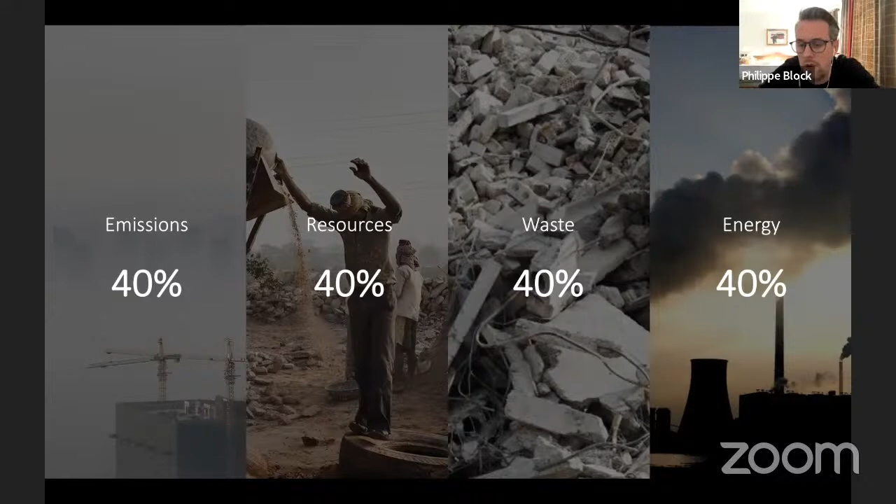I hope we don't do it like this, particularly because globally our industry—and when I say our industry, I'm talking about both construction in general and the building industry—we are globally responsible for 40% of the man-made greenhouse gas emissions, 40% of use of virgin materials or resources, and we are huge waste producers as well.

So I hope with these few slides, and again I do hope that I'm preaching to the choir, that you agree with me that we have to change both the way we design, but also how we build our structures.

As a structural engineer, a structural designer—so half architect, half engineer—I will be focusing mainly on the embodied emissions. Those are the ones related to everything that happens before you turn the key and start operating a building. So the impact of materials, of transport, of construction, and so on.

One of the reasons I'm excited to be in this field is because, maybe cheekily, we do have a theoretical solution to address the operational emissions just by switching. If we would do this at a global scale, we kind of have a solution: we can go for renewable green sources of energy.

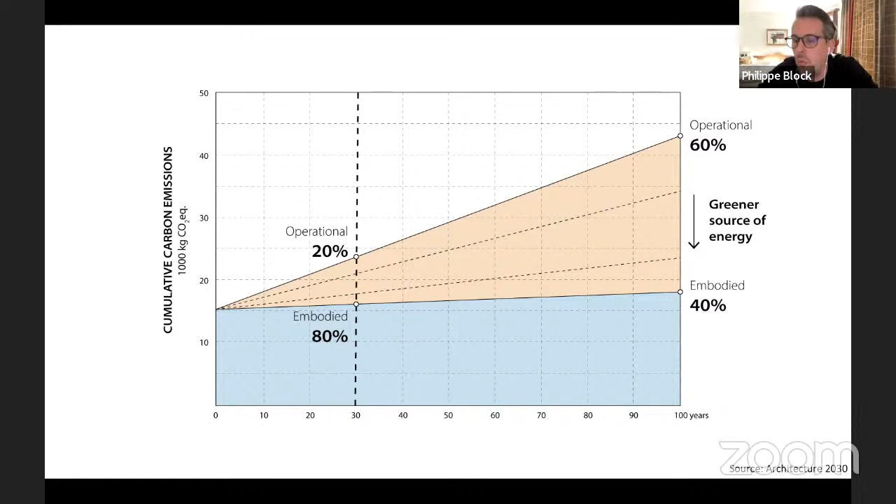These coefficients can be looked up for different contexts and different materials—numbers that give you an estimation of the emissions, the carbon footprint of a material. And then, last but not least, very important, you want to divide this over the lifespan of your building, ideally.

But this is also an opportunity to add some circularity, some circular thinking in there, because through those attitudes—and I will talk about this at more length through applications and examples—you want to try to keep resources, components, and indeed ideally your building, as long in the loop, in the circle, as possible.

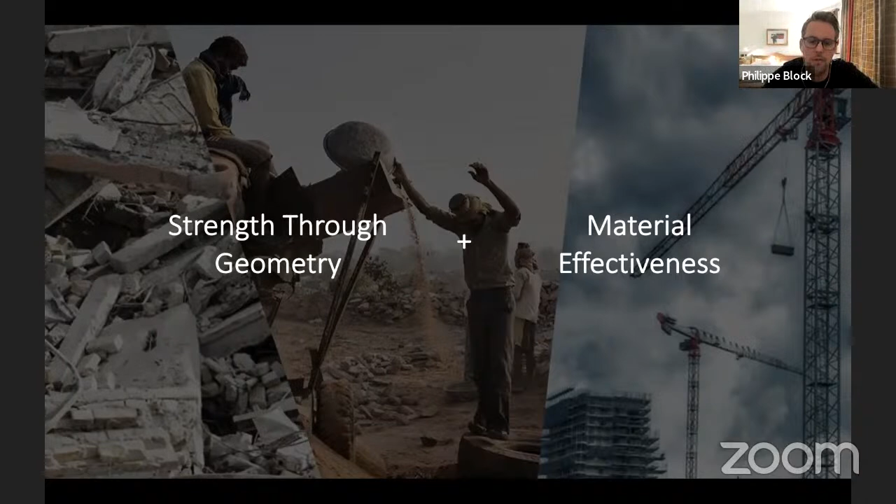So let's first look at strength through geometry, and I will use five projects that we have done to highlight some potentials and different aspects that could offer some outlooks.

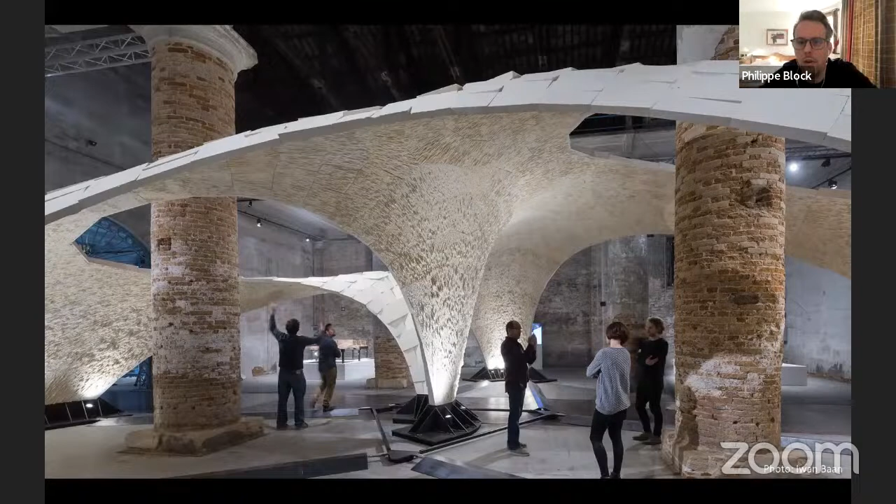I start with the Armadillo Vault that we built for the 2016 Venice Biennale. What you're looking at is a cut stone vault with 399 pieces of cut stone held together without any glue, without any mortar, without any reinforcement. This is really structural geometry, good structural form—gravity and historic principles that hold this together.

The reference for this kind of project was, of course, my original research focus on understanding why these beautiful structures—here the fan vaults at King's College at the University of Cambridge—are still standing after 500 years. The more I studied those, the more I realized that in modern design and engineering we might have forgotten some essential principles that allow these unreinforced vaults to be perfectly safe still after centuries, even though they have a thickness-to-span ratio proportionally as thin as an eggshell.

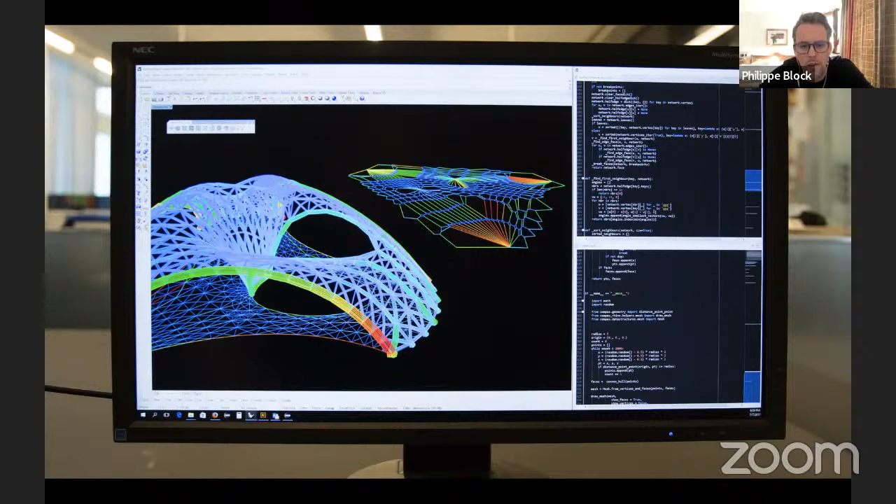So we have been developing a lot of tools to rediscover, to look at these geometries. This is, for example, Rhino Vault, which we showed very early on and which is used by many practitioners and students alike. But we did this statement at the Biennale because you can do anything on the computer, and we really wanted to shake the community.

And here you see, by the way, our colleagues of the Escobedo group out of Austin, Texas, assembling this stone vault indeed without any connection, just dry assembly.

So here you see some additional images. It is still in boxes. There are some rumors that it might finally be installed for its final resting place, I guess, but let's see if that goes forward.

But what I wanted to show with this project is, again, looking at this very thin sheet of a very humble, simple, traditional material, what you can achieve when you get the geometry right. The first thing I want to say is: if you get the geometry right, if you reintroduce these first principles of vaulted traditional geometry, you can significantly reduce the volume of your structure, so the mass—an important part in that equation.

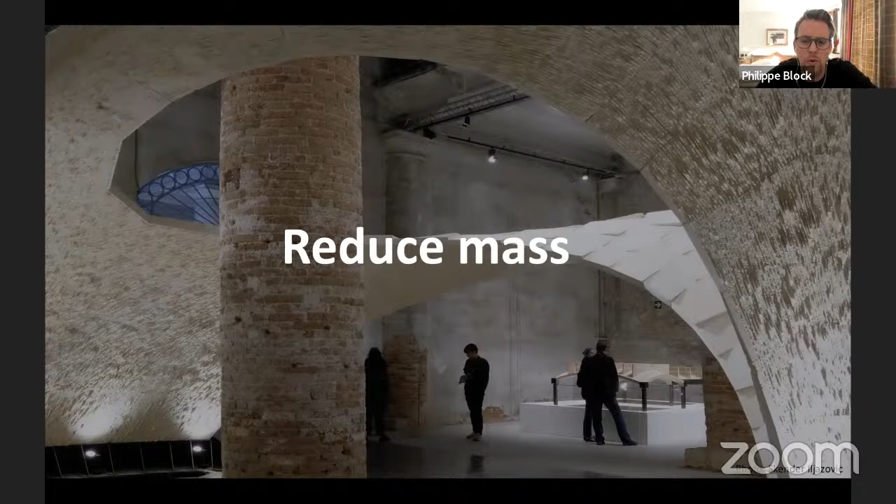A second aspect about strength through geometry I want to show through this project, the Mapungubwe Interpretive Center by Peter Rich Architects, John Ochsendorf, and Michael Ramage. I was lucky to be involved in the safety assessment of the engineering of the vaults that were built.

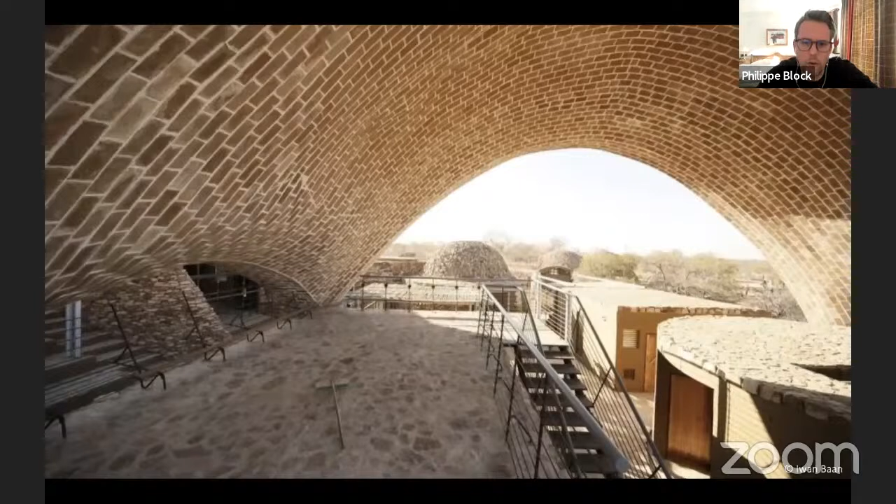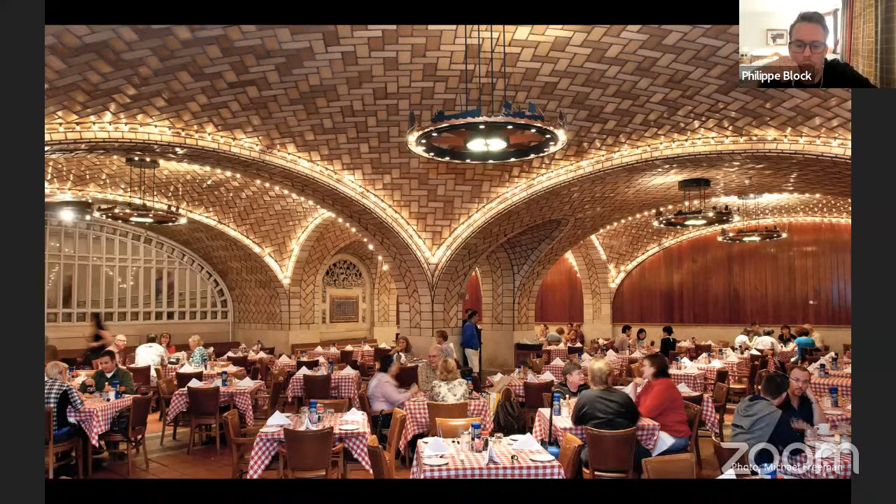This is in a very remote site, using soil-pressed tiles, so vaulted geometry tile vaulting. The reference here are these beautiful tile vaults by the Guastavinos, for example here in the Oyster Bar in Grand Central Terminal in New York City.

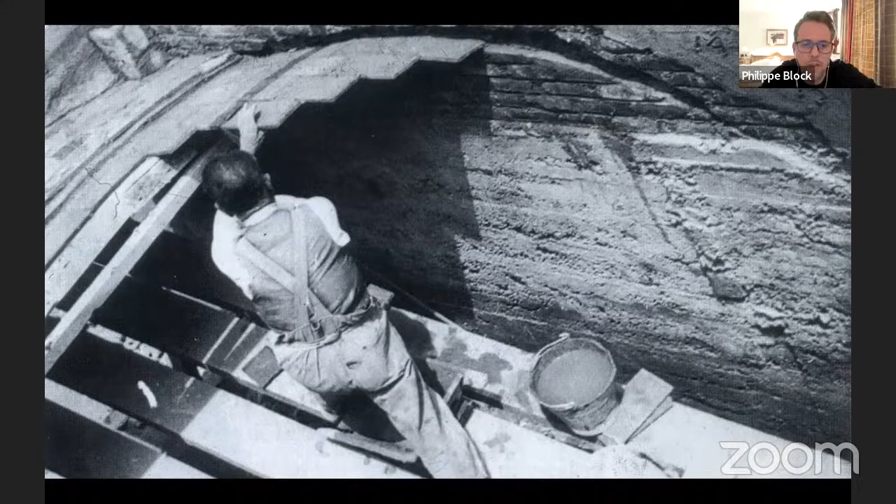So what you're looking at is not decoration. It's one of three layers of unreinforced masonry of tiles that were layered without the need of scaffolding—well, scaffolding yes to work, but no formwork needed.

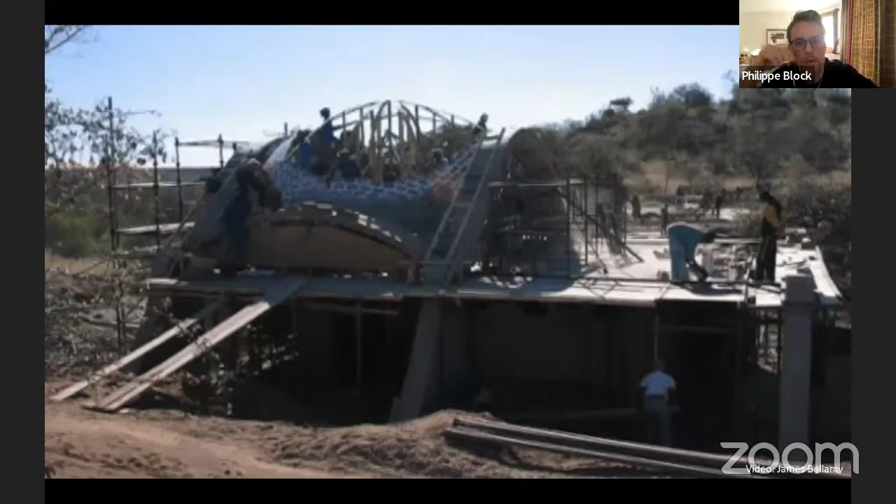This was great to introduce in a context where materials are expensive, where you had to bring in everything. So all the timber that you see there is not to support, it's not formwork, but is actually to guide unskilled laborers, over one to two weeks, to basically trace this funicular, compression-only geometry. Here you see some first successes.

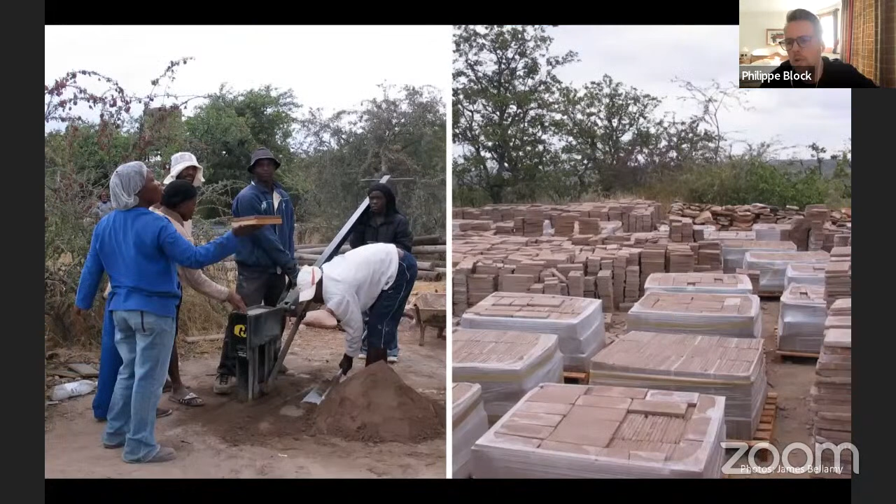But the reason I show you this project is because it was driven by using local resources in all aspects—local communities, but also local materials. So here you see on the left, the soil being compressed with just a little bit of cement, 7% of cement, to make these tiles that then could be assembled.

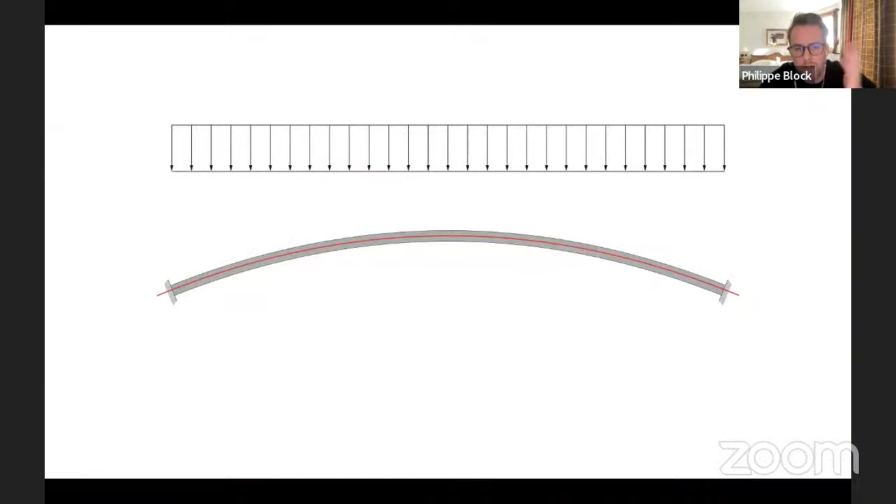So what's happening here is that we have an arch, but an arch is only good for a certain loading case that you design it for. You also need live loads. The red line represents where the forces might want to travel in compression. In this case, with the thin arch, we don't have a path to safely bring these forces to the support through compression only. So we added some stiffeners.

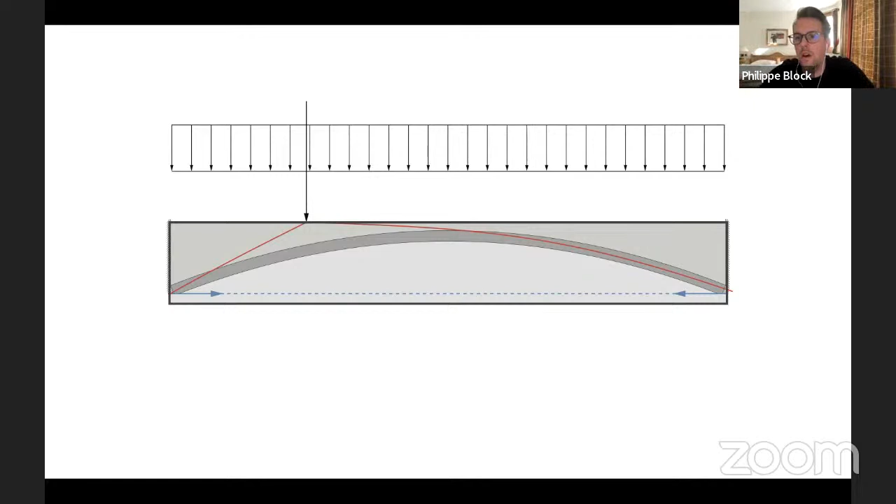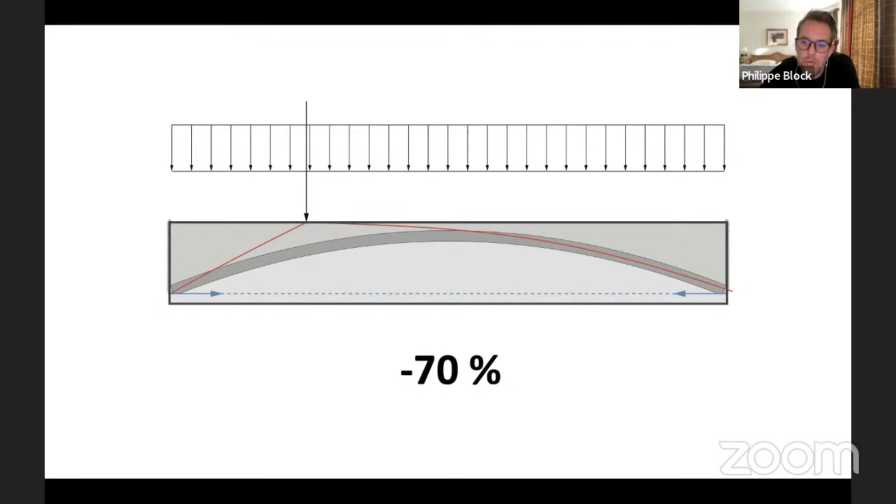And if you then add a tension tie, what I just did with you in the last 10, 15 seconds is we basically reintroduced an alternative to our typical reinforced concrete beam or floor plate, but one that uses 70% less volume, right? So this is actually exciting. There is no computation, there is no kind of complexity here. It's reintroducing common principles that we are no longer using. And in our context, I think this number speaks for itself why that is relevant.

So this was a nice case study early on in 2008. This was constructed, so this weak material is still the permanent structure for this museum building.

So the second aspect that I wanted to highlight is that if you get the geometry right, if you get strength through geometry, then on top of reducing the volume, the mass, you can also significantly reduce the emissions of the material. And why I can say that is because we can activate low strength material to be safely structural, and there is almost a one-to-one relationship between how strong a material is, its material strength, and how polluting it is, what its carbon footprint is.

So here, by just having these local sources, this of course offsets the impact again significantly. So that's the second part, the ECC, the embodied carbon coefficients in our equation.

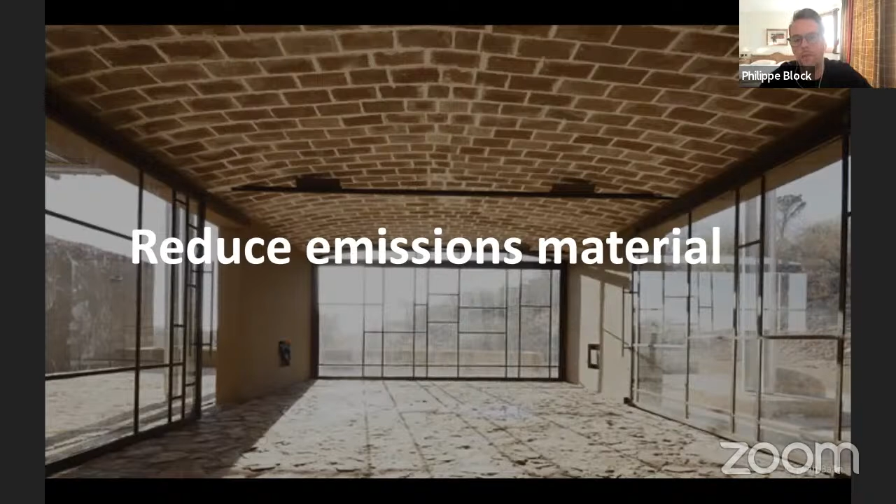A next project that I want to show is one of the latest that we have done. So Striatus, which was a collaboration with Zaha Hadid Architects and Incremental 3D. We just dismantled it. It was there for more than half a year at the Venice Biennale this year.

But we wanted to show that if you indeed treat the material for what it wants to be - I would say concrete is an artificial stone, and an artificial stone is happy in compression - if you can generate systems that really understand the limitations that we translate into opportunities of the material, then you can get to a next level of efficiency indeed.

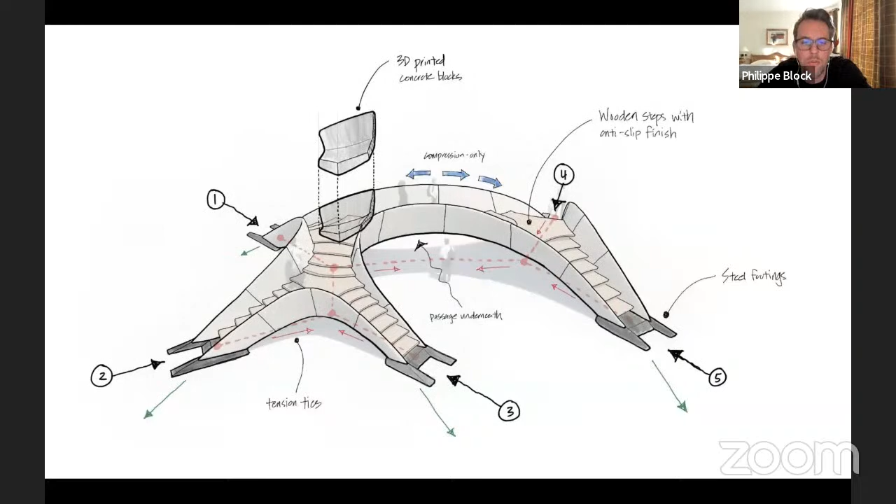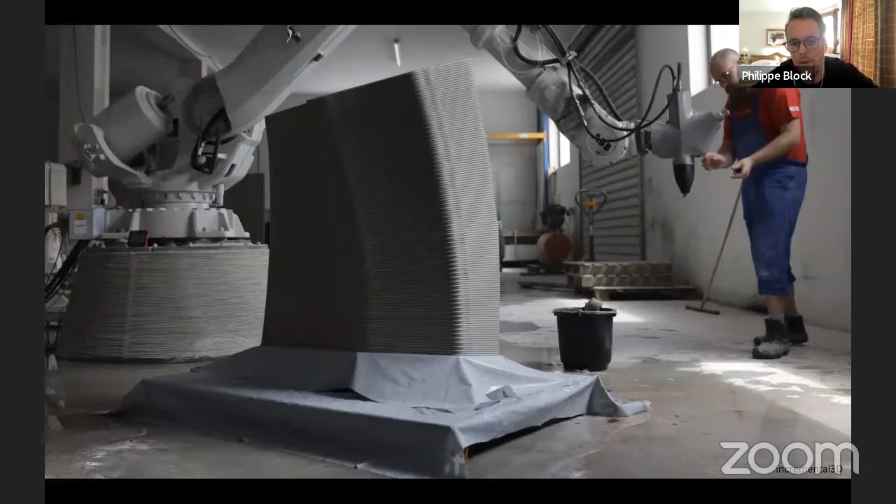So from the beginning, we used our typical masonry kind of strategies to discover geometries that would be suitable. But then on the level of the elements, it was important to use more advanced concrete 3D printing, called 2-component 3D printing, which allows you, as you can see here, to not have just a simple extrusion, horizontal extrusion, but an inclined layer printing, so that you can align your print layers to the forces in the system.

I don't have time to expand on this too much, but the trick behind all of this is that rather than what typically is being done - designing a geometry, discretizing it, then seeing if it works - this process actually started entirely the other way around. This is the work of Shajay Bhooshan, his PhD. In our case, we basically encode all the fabrication constraints, all the structural logics, both locally and globally, in the print paths. So we continuously treat the print path explicitly, and geometry is implicit. But of course, we also need strategies to have global control.

But this is a key thing in this project, very clearly: we set up a custom design framework that allows us to embed all this knowledge in every single design iteration that we generated as a collaborative team among all the different partners.

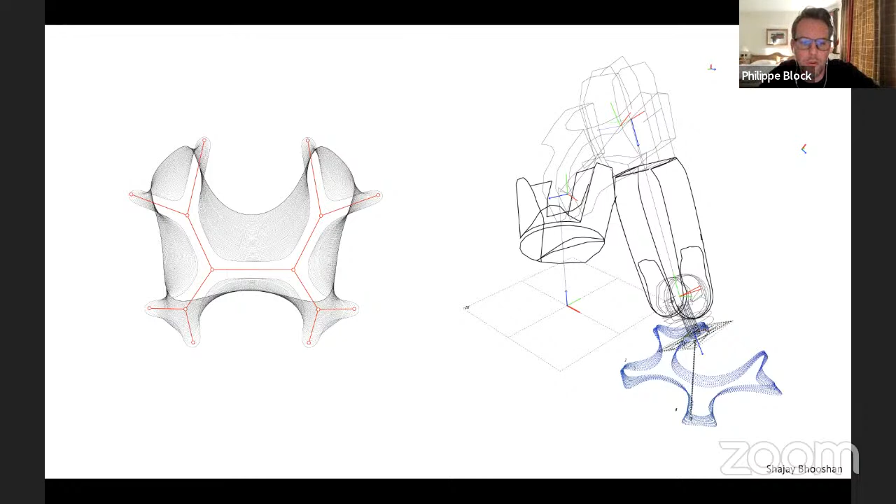But the key point I wanted to show is that I do see an outlook of an appropriate use of concrete 3D printing. Appropriate in the sense that we use this new technology to really offer the concrete material to work as it wants to be used, as a masonry system. So you see this offers, on the left, a synthetic stone that is hollowed out, where material is only placed where relevant.

And on the right, again, this alignment to a 3D flow of forces, which allows us to not only be unreinforced and dry assembled globally, but also locally we don't have any reinforcement in the 3D printed concrete. So there are no fibers, no embedded layers, and so on.

So this structure was safely designed using a combination of high-tech opportunities, the promises of 3D printing, and historic principles behind it. Another thing one has to highlight in the argumentation for 3D printing is that the 53 stones of the bridge had a total printing time of 84 hours.

This is super exciting, because it meant we could keep pushing the design engineering all the way until the final moment where we could just crank out all of these elements. None of them failed, because, as I said, the long-time experimentation and coordination between all the computational pipelines allowed us to fully understand what the constraints of this 3D printed material had to be.

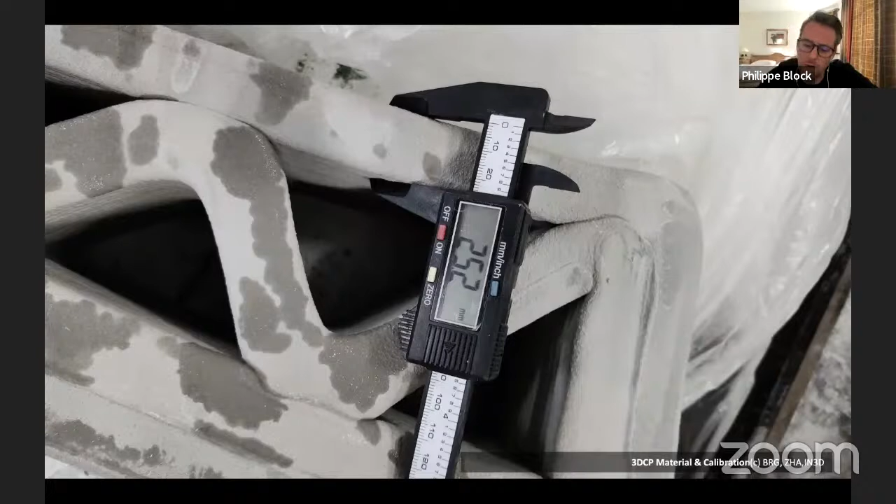In this case, the 2.5 centimeters thickness of the printed layer was not sufficient to deal with these local impact loads. That meant we had to basically have the nozzle pass twice over the structure. And so, even though this is not part of the global geometry, from a fabrication standpoint, you see that this changing of the nozzle creates a very dominant feature in the middle.

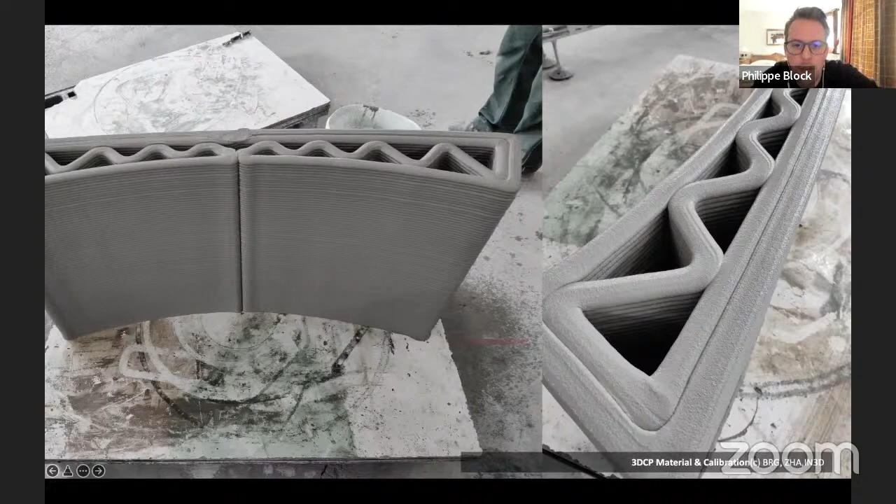The design team was not happy with this very pronounced feature. We only needed a thickening on the top layer, so instead we decided to have this turning around happen at every single layer. So this was something that was a necessity, a conclusion of fabrication.

But rather than being frustrated by it, we took it as a design opportunity to have aligned features that really show they're in line with the global force flow of the structure. And then, because of the masonry logic, we could simply assemble it on site.

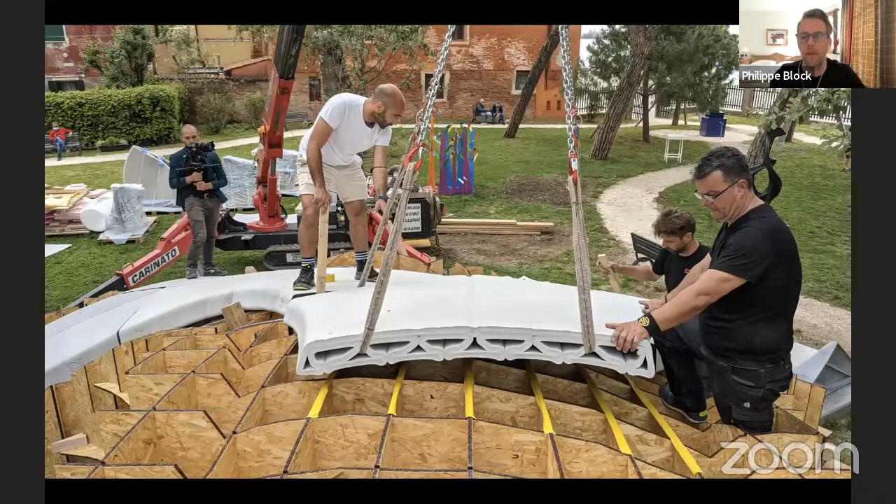I'll just actively say it before someone says, yeah, you talk about sustainability, but what is all this single-use timber you're using there? This project took just a few months, a lot of stress. We were innovating on the material side, the engineering side, the generation side, and so on. I'm already making excuses, but believe me, there was no more time to develop a fully reusable, demountable system.

I hope you'll accept my apologies that we ran out of time, but for me this is actually a no-brainer because you just need 3 points per piece. So we can imagine that in the next iteration, which I'm very pleased to say will happen, in fact a permanent structure, we will no longer use the single-use timber formwork.

So here you see another advantage: because we place material only where needed, these elements are very lightweight. That allowed, on the left, 2 people from a professional crew, together with 2 people on my team. You see, by the way, on the right, that is Tom Van Mele.

The brain behind many of the things that we do. With him, I co-lead the group. So only these 4 people, 2 non-experts and 2 experts, could assemble this bridge in just a couple of days.

So here you see that we only needed a very simple, lightweight spider crane to assemble these elements, and they nicely came together in a dry-assembled kind of way. So why was I excited about showing this bridge to the audience at the Biennale? Because we achieved different aspects that could really be a framework or opportunity more globally than just this funky structure we built.

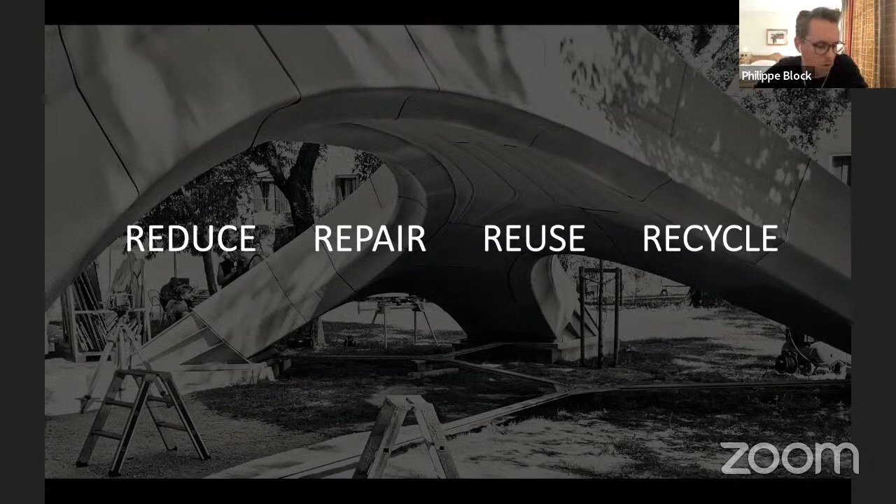All right, so that's what we wanted to show with this bridge. I'm happy that we managed to share these bigger points. It was in this beautiful garden - sadly, it's no longer there, so you can no longer go visit it.

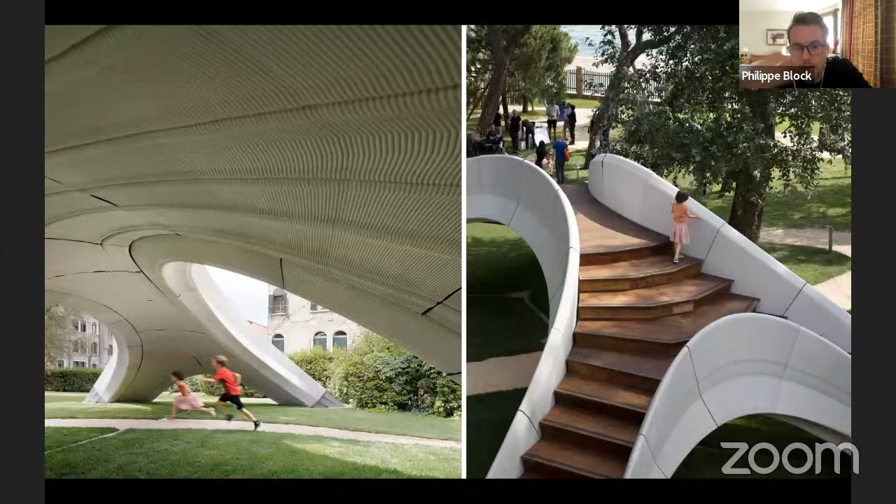But that's why I bring you a few nice pictures by Studio Naaro. Here on the left, you see these grooves, these features that were a fabrication necessity that we turned into a design opportunity. And yeah, it was great - every day at 5 o'clock the entire neighborhood came around, with the 20-odd dogs that loved walking under it, peeing against it, jumping on it, and so on. So this was a very beloved kind of object.

Maybe here also a nice thing to show is that because we have this global control - because we really control the print path from layer to layer - we can also control these kinds of little defects. These traces you see on these edges are actually where the internal stiffener nudges the outside layer a little bit. So rather than taking this as something we need to fight, we take it as an aesthetic opportunity to give that additional layer of legibility to the structure.

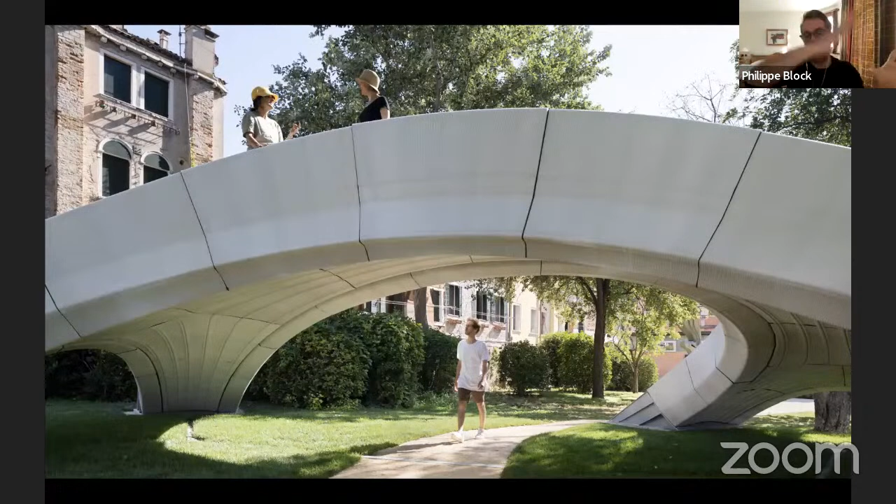So here you see very clearly what I started with - this masonry on two levels, globally the discretization, as we've seen with typical masonry, voussoir arches, like a Roman arch. But then you also appreciate this alignment of layers to the global force flow.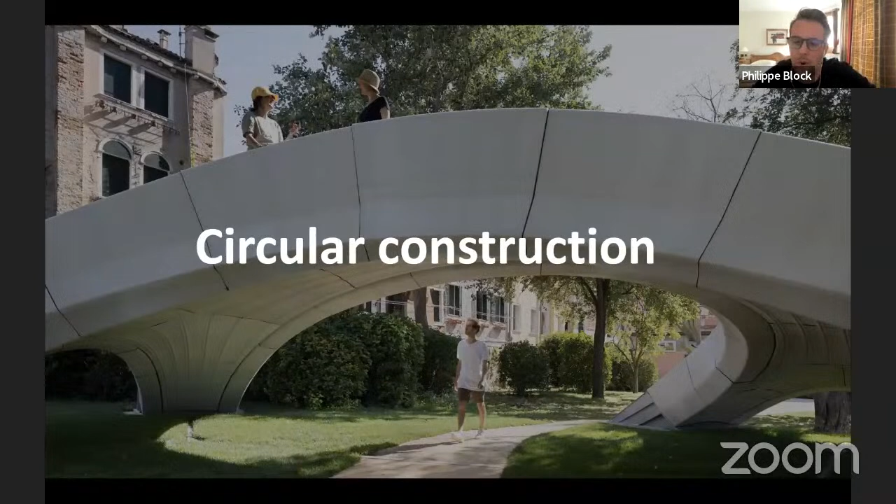So the message in this project is some hints about how you can start to address this. How you can start to design for future demountability, design for future recyclability. This is essential because with this unreinforced concrete, we have a pure, non-polluted material that can be easily recycled. That means that in the next batch of concrete, we no longer need to use virgin resources - we can use construction demolition waste going forward, as an example. But I also gave - of course, the better option is to directly reuse your components, and this will be relevant in the future.

As I said, it was very intense collaboration between our groups. Zaha Hadid Architects' CODE group, then Incremental 3D were the digital craftspeople, the 3D printers out of Innsbruck, and then Holcim developed the specific concrete inks, and also made this project possible by backing it financially.

But all of these different teams, all of these different innovations could not happen in parallel if we had not, from the beginning, found a way to make sure that all of our knowledge and experiences would come together. That is where we have used, in all aspects of this project, this open source computational framework which we have developed. It's been in development for 5-6 years, and it's now a full community-driven process. This is called COMPAS.

All right, next project. It will be a small sidetrack, but I still find it an exciting project to show. It shows the challenge and the potential opportunity of computational design and digital fabrication to address the fact that structural geometry is non-standard. Non-standard geometry is typically much more expensive, difficult, and wasteful to realize compared to our status quo, our polluting, problematic status quo of straight beams, floor plates, and so on.

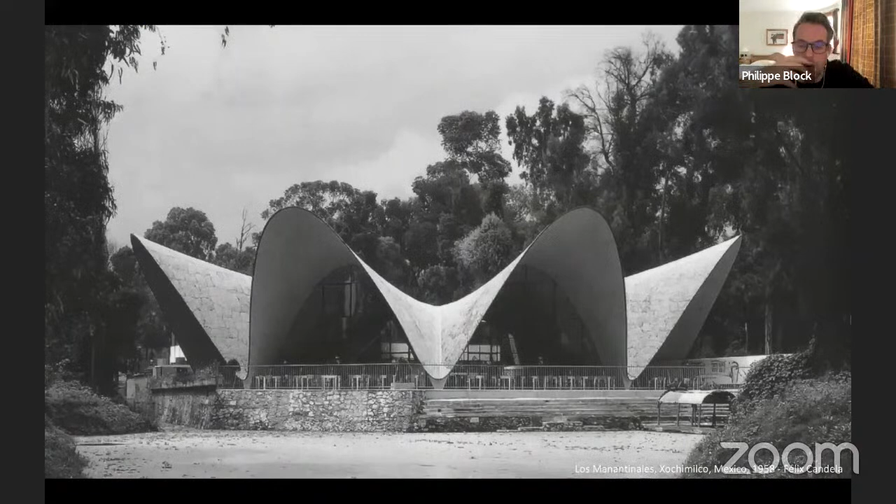So what we did with KnitCandela - it's already in the word - is we wanted to show the opportunities of a knitted formwork, a 3D knitted formwork, and we wanted to do this in the context of the famous shell builder Felix Candela. Felix Candela did these amazing shells, very efficient, hypar shells, with 30-meter spans and only 4 centimeters of reinforced concrete in thickness.

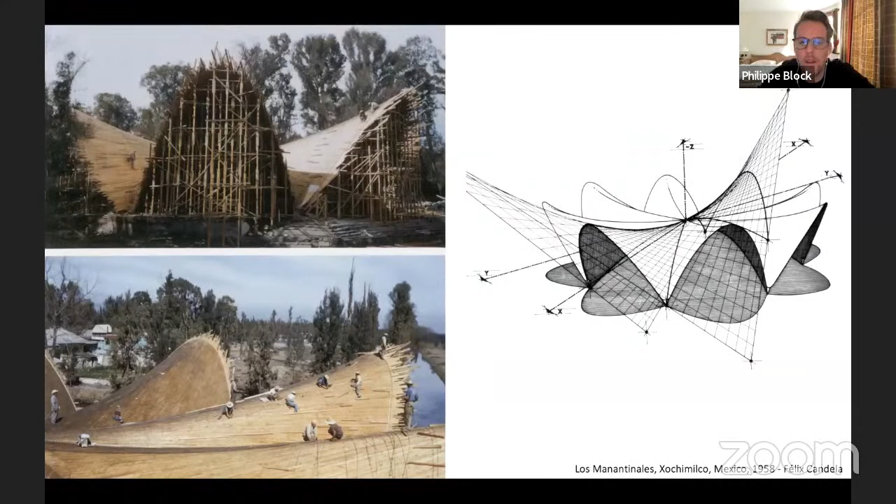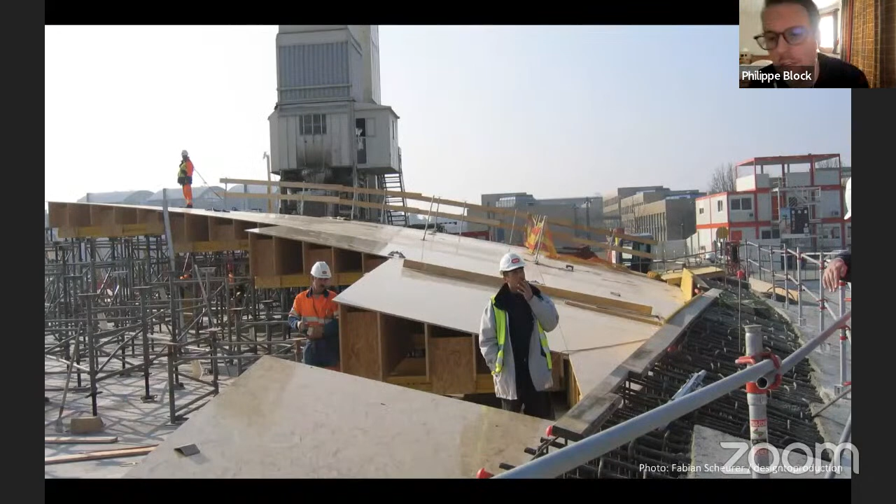But with these formworks, there was a lot of labor and resources involved, even though he used hypar surfaces that allowed straight formwork elements that could be reused. You can imagine that these kinds of formwork systems would be prohibitively expensive and problematic in today's context. Modern surface structures in concrete deal with this challenge too - you need scaffolding, formwork, a foundation, renting of this formwork. You build a beautiful, super detailed timber structure that will only live 28 days until the concrete is ready, and then it turns into this.

So that is what we've been challenging with projects like KnitCandela - to challenge the traditional, brute force rigid formwork, where you need all that material, often single-use material, just to keep your mold, your formwork, pushing against gravity. And on the right - this is a bit of a caricature - but you see that a flexible formwork has the outlook to significantly reduce the foundations, the logistics, and the waste associated with realizing these very efficient structural forms.

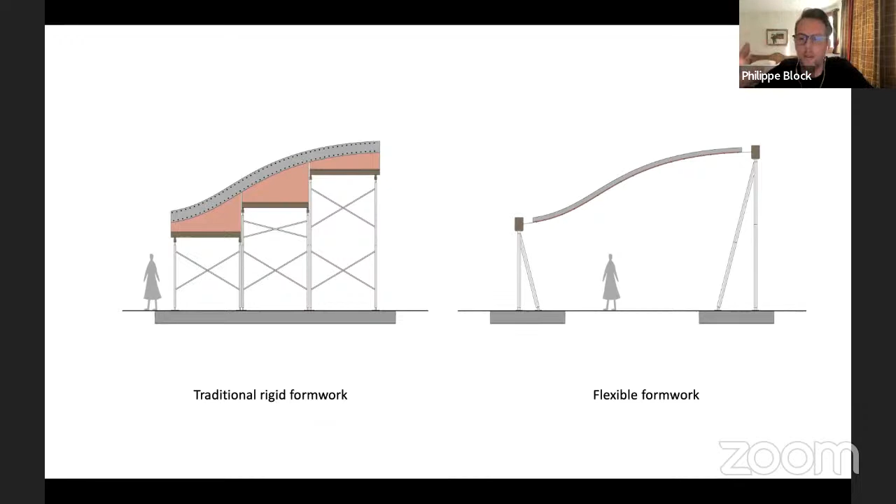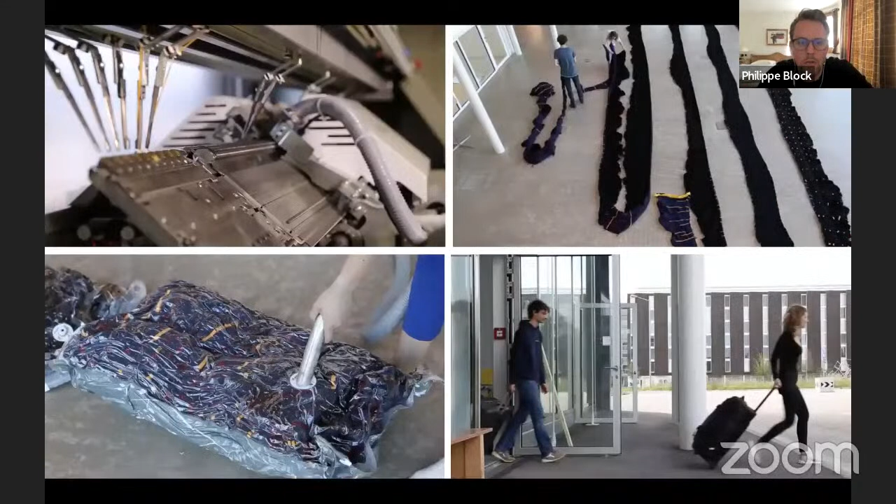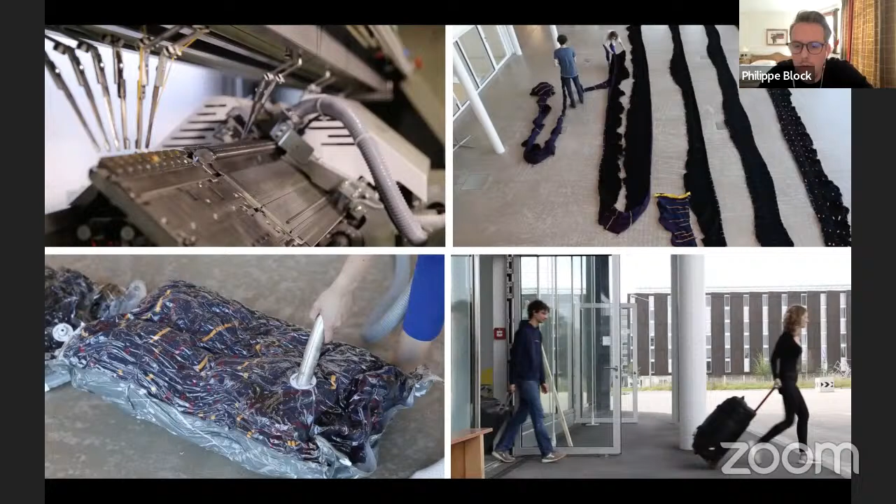This was the PhD research of Mariana Popescu. She's now at TU Delft. Here you see this knitting machine. On the top right, you see Mariana knitting arguably the longest scarf in the world, which could be very lightweight, vacuum packed, and then brought on site in 2 suitcases.

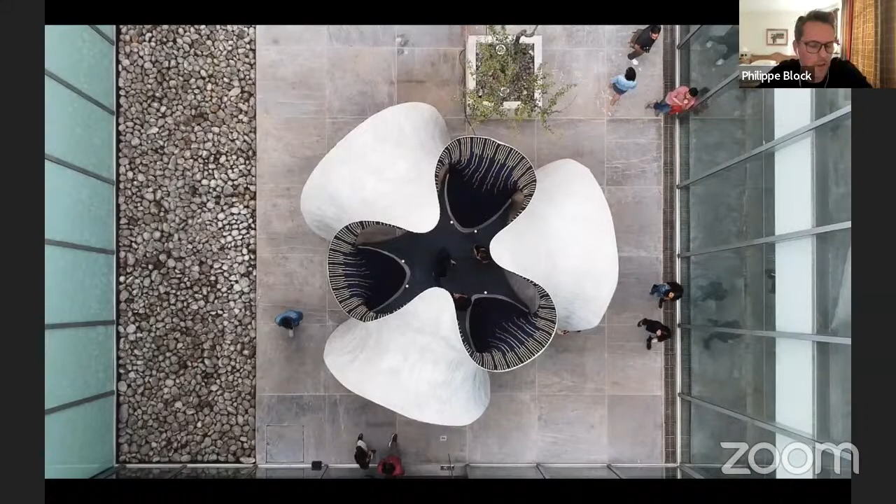But perhaps here, because I make all of these statements, let's look at some numbers for this shell. We are talking about 50 square meters, or 5 tons of concrete. The total cost of the cable net, the connectors, the knit - so everything except the reusable external formwork - cost only 2,300 euros. And the total knit weighed only 25 kilograms, which allowed it to be brought very simply on site.

What is exciting is that if you calculate, using references we used for this, in order to generate a mold that would achieve the same geometry, we would be milling for 3 months non-stop. And here the entire knit was cranked out in 36 hours, considering that from the very first email where Zaha Hadid Architects invited me to collaborate to the opening of the exhibition, that time frame was only 3.5 months. We needed to develop the system, do all the design iterations, the engineering, the fabrication, and then the on-site construction with a construction crew we never worked with before.

So I quickly translated this: 500 square feet, $2,500 US, and 55 pounds. So those are, I think, starting to be some convincing numbers indeed.

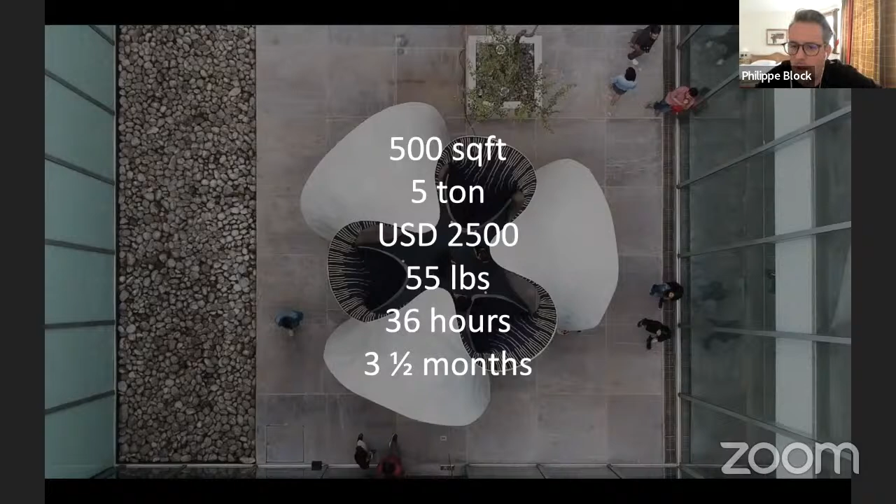But what is more convincing than sending 55 pounds to the building site is just sending data. These knitting machines are standard machines available anywhere. So we can also start to imagine different ways - I don't want to overstate it - and we have to reflect on what happens in prefab, what happens where, what happens on site.

And we need to not only optimize the ecological aspects, but also rethink the processes and efficiencies on site. All right, so now the last project I wanted to show is perhaps the first of my projects - except for the South African one - which I'm very proud will not be dismantled, demolished, or pushed until failure. It's a permanent structure, finally.

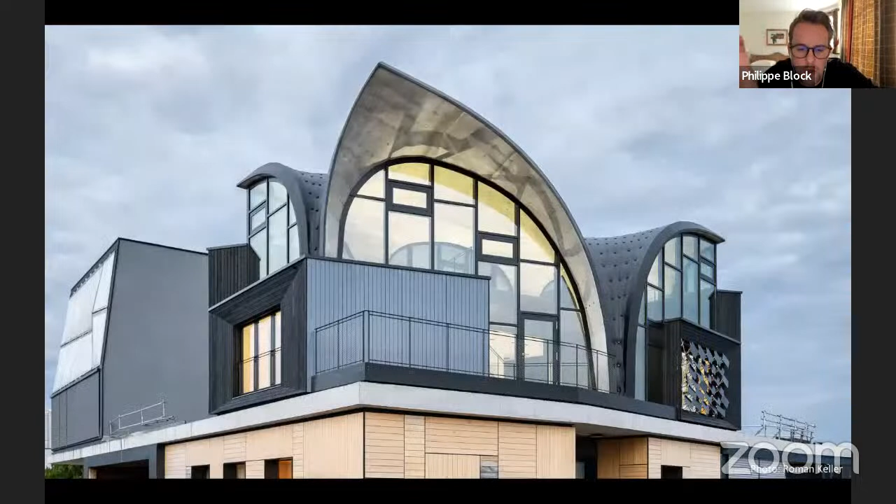So it is a unit on top of a building. It shouts loudly, so it looks very weird. So let's pay attention to it. Let's see what it has to say.

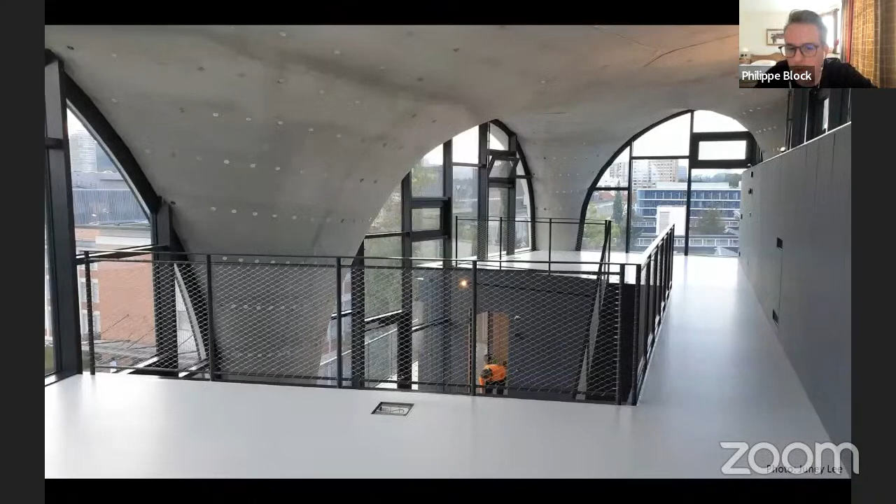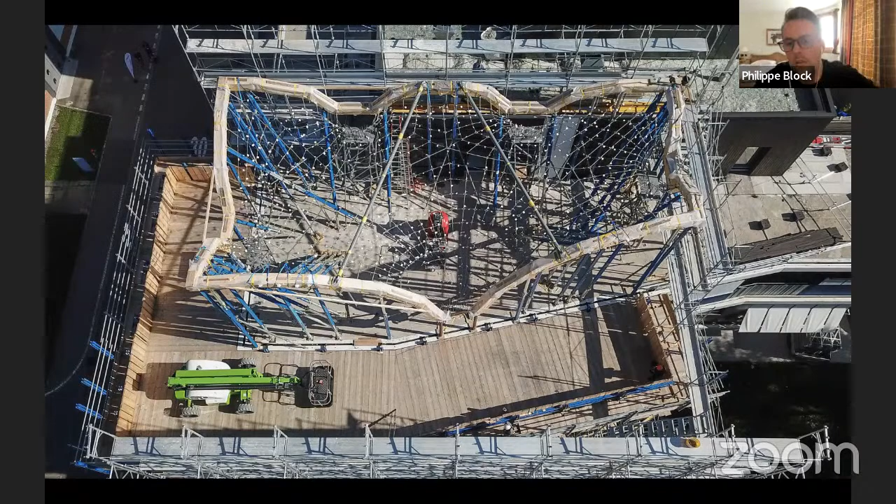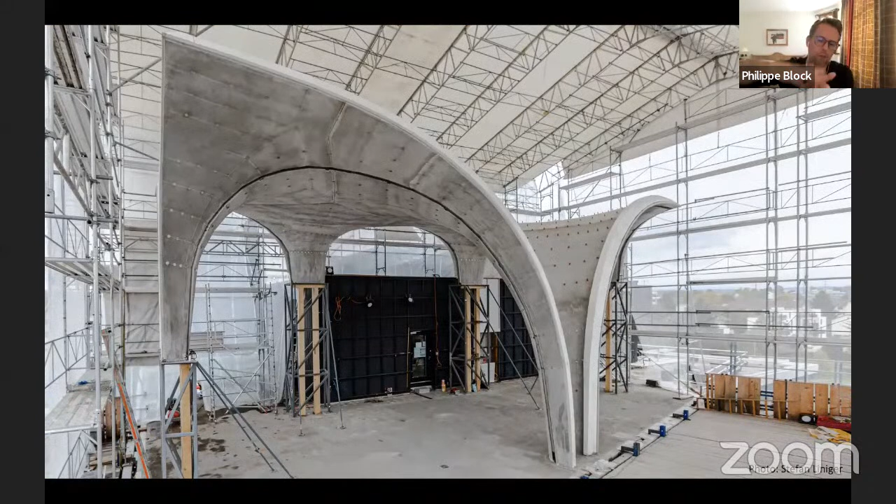Maybe the roof is already quite unique. You can see - well, you don't really see - that it's a very thin shell, built on flexible formwork. In this case, not stay-in-place, but we developed a kit of parts that allowed it to be reused. We used this kit of parts for two shells: the full-scale prototype and this one. We used a fabric formwork to spray the concrete on. So we had this shell only on 5 points, up to building standards. We also had, in certain parts, a double layer shell to avoid any thermal bridges.

This is a bit crazy. It addresses similar kinds of things, but I don't want to linger too much, because basically what we wanted to do with this shell is show that this is possible in time, on budget, with traditional partners, if you approach it with a very coherent BIM on steroids, as one of our partners told us, through COMPAS. So everything in this project - all the coordination, all the new innovations - was introduced in this real-life project through this open source platform. I hope some of you will look at it.

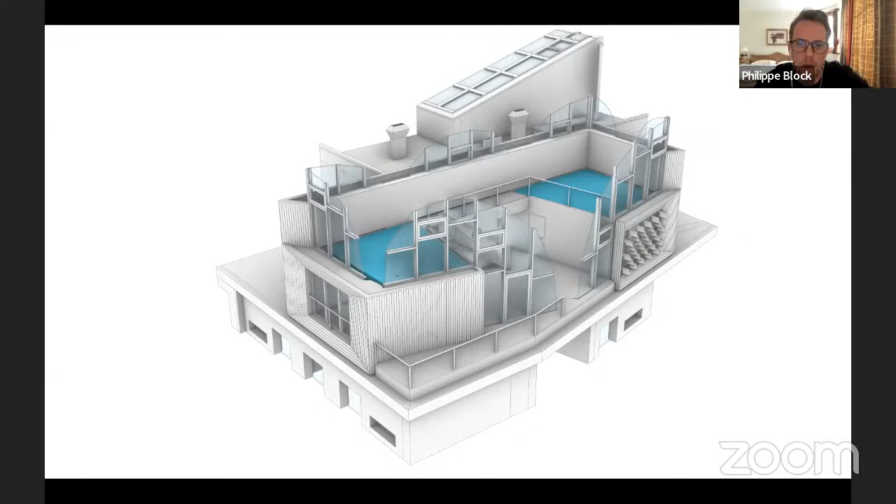But so the roof is there as a neon billboard sign, saying look at me. But the reason I'm excited people are looking at it is because of the floors. There's something special about the floors - you can't see it too much in this picture, but they're 3D curved, so they have this vaulted geometry. Let's look at this floor.

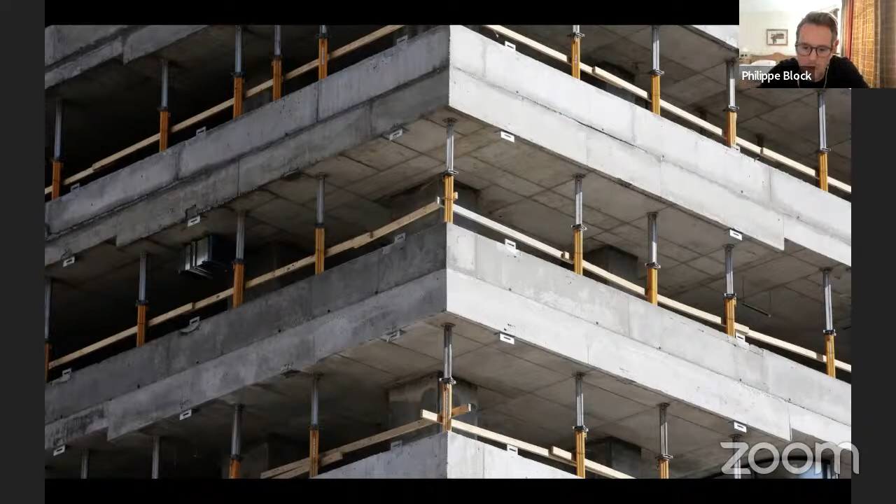But first, I want to sketch a little why I'm increasingly excited in this presentation to show you our floor developments. This is how many floors are being constructed in concrete all over the world. But what's really interesting is that if you look at medium high rises, 10 to 30 stories - a very typical typology in densified urban areas - you see this absolutely absurd situation that three quarters of the mass of those buildings is in the structure.

So as a structural designer, I am very frustrated by these kinds of things, because it suggests that the structure is mainly there to keep itself up. If you zoom in more, you see that more than half of that structural mass is in the floors. So spanning space is really the bottleneck, the most material intensive component. Very banal - we all need a floor to walk on. That is the element where we really need to disrupt.

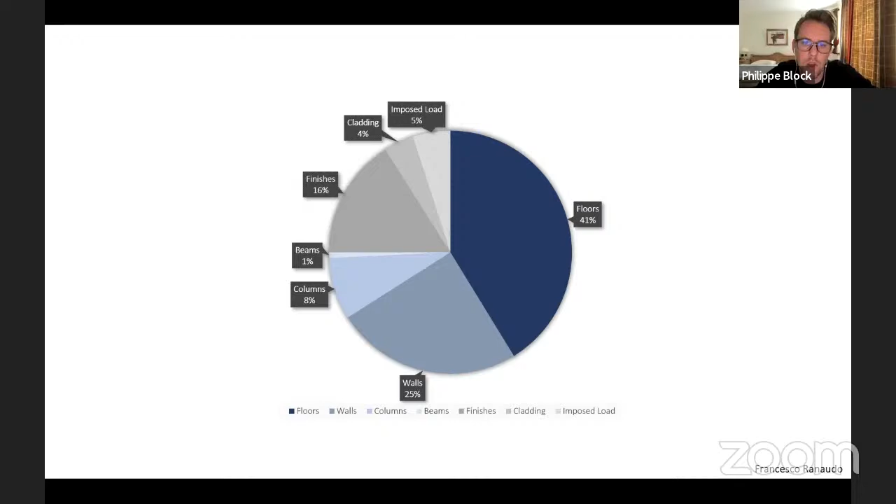And that is what we are now trying to do with our research. We talked about building the equivalent of 1 New York City every month for the next 40 years. Another calculation is that in that same time frame, we will be building more than 200 billion square meters of floor area, which translates to more than 2 trillion square feet.

So this is quite a challenge, or another way, this is quite a business case. So let's now talk a little bit about material effectiveness, because maybe many of you are still listening to me with a bit of skepticism. Why is he talking about sustainable achievements and he's only talking about concrete?

Well, all of us seem to agree that concrete is the most destructive material on Earth. Well, yes, but is this statement by itself really appropriate? Again, it relates to the fact that it is not just a material problem, and we have very good proof for this. If you look at concrete, the embodied energy per unit mass, or on the right, the embodied carbon coefficient, you see that concrete is actually quite a good material. The problem is how we are using concrete inappropriately in geometries that it doesn't want to be, and so on.

You see, the only material that we can absolutely not beat is sustainably sourced timber. So let's question what it means to source timber sustainably at the scale that is needed for urbanization and growth. What does it mean to really have sustainability in timber? That means that we cannot use engineered timber, because these components we will have to trash or incinerate at the end of their lifetime. So what I'm saying here is that we have this material that is readily available throughout the world. If we start to use this material in how it really wants to be used, probably we have a good strategy.

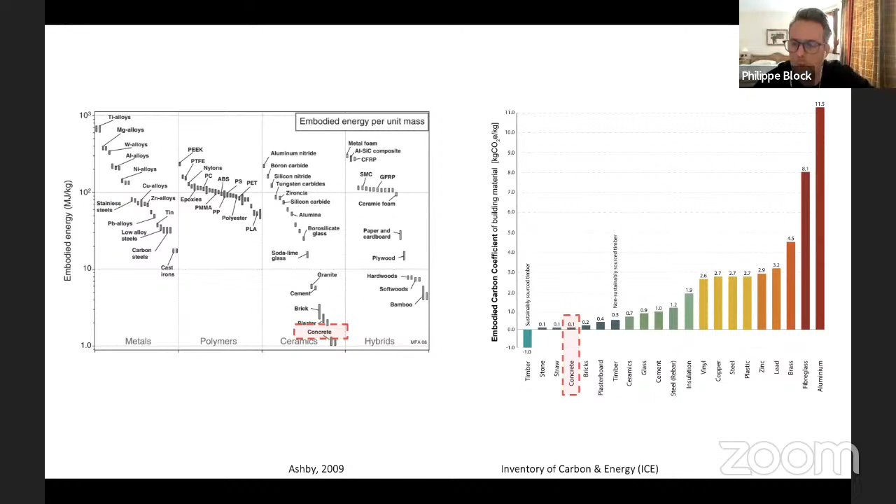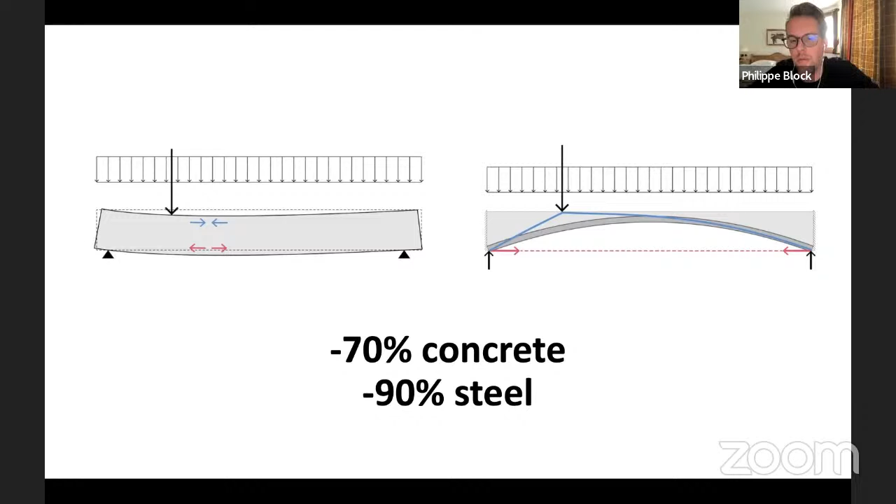It's probably obvious to you where I'm going with this. Artificial stone, that is what concrete is. These kind of geometries are really how concrete wants to be shaped. And by doing that, I focused on the volume before, but by forcing concrete to be the flat slab, you need so much more mass, you need so much reinforcement steel to force this material in a non-natural kind of geometry. So this is what we achieve.

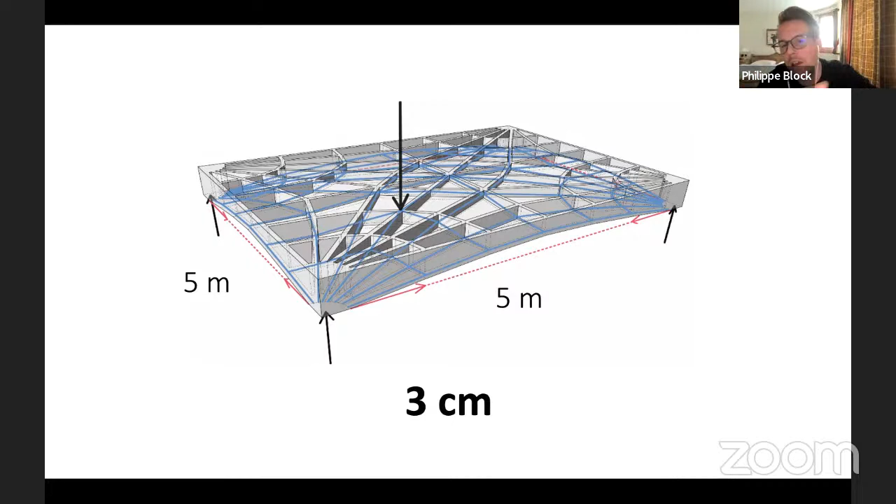And that is then what we started to translate into 3D to be even more efficient. So the simple arch is now a 3D shell with stiffeners that accumulate to the corners. And that allows you to design, as an example, a 5 by 5 meter floor plate with only 3 centimeters of unreinforced concrete. These are exactly the numbers of the HILO project, where we have a fully approved, fully engineered, real project that spans 5 by 5 meters with 3 centimeters of unreinforced concrete. Translated, we are talking about 16 by 16 feet with just over an inch of low strength concrete.

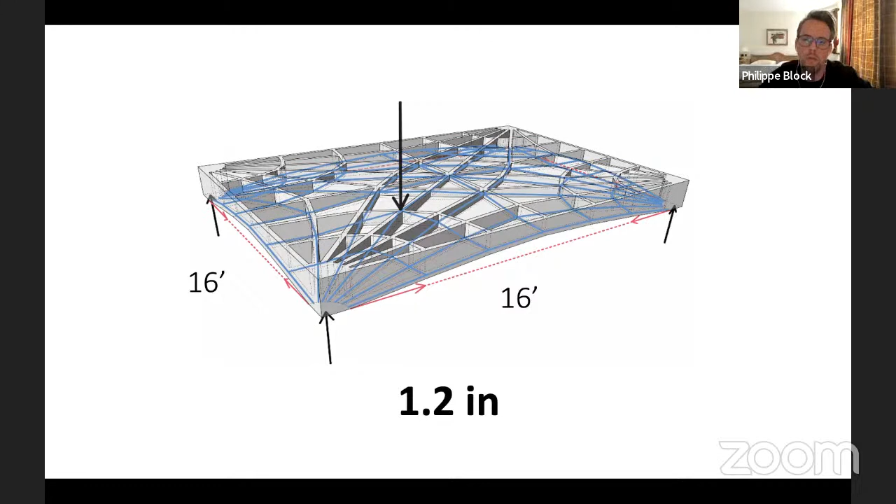And by the way, we use more than 50% of cement and aggregate replacement coming from construction demolition waste, another opportunity when you have very, very low stresses in the material. So this is not new, this story. We have been developing this for the last decade, literally.

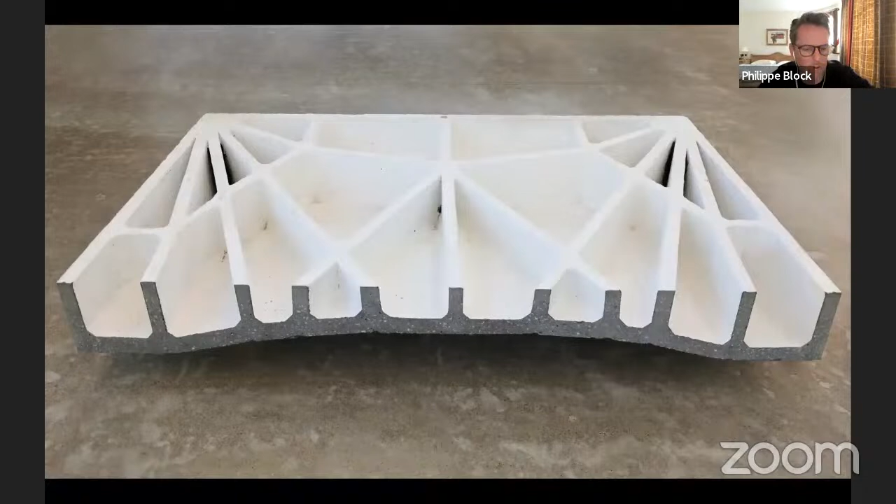And in fact, next to the Armadillo Vault, a similar idea that was shouting look at me, we already presented one of those floors. You see these nice stiffeners accumulated. An even earlier prototype from 2012, after cracking, you see how thin these geometries are indeed.

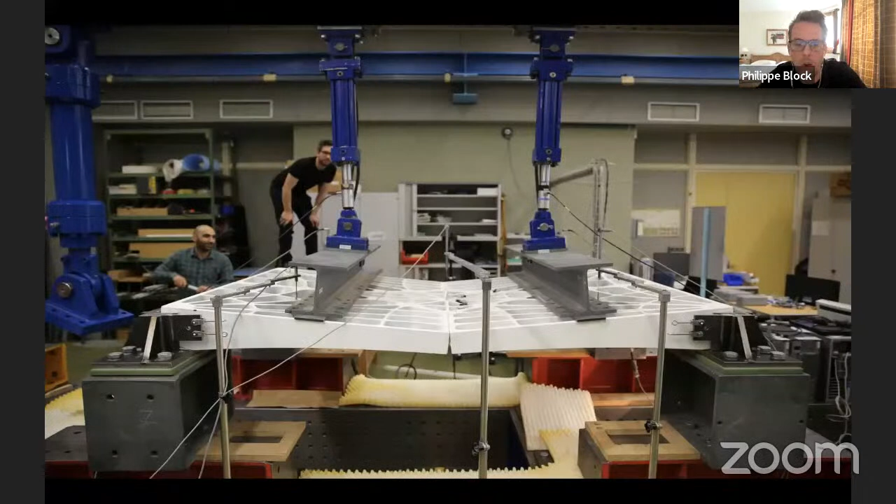And then we did many experiments. Another one was to use an equally weak material as the tiles in South Africa, so just 10, 15 times less compressive strength than standard concrete, but absolutely no bending capacity. So we 3D printed this, this is cement 3D printing, and we also showed this already in 2016. We did the entire American Concrete Institute's recommended loading protocol to demonstrate that the structure would be safe.

Satisfying all loading conditions. But if this doesn't make sense, then maybe these 1,200 kilograms of ETH nerds, part of our research group at the time, standing on a 2 centimeter unreinforced structure with material properties equally comparable to cold dark chocolate, perhaps this is more convincing.

If you think that what I'm presenting is totally disconnected of modern practice, if it is academic, naive and so on... oops, I was preparing for a slide. I didn't see my next slide, so I'll skip that one.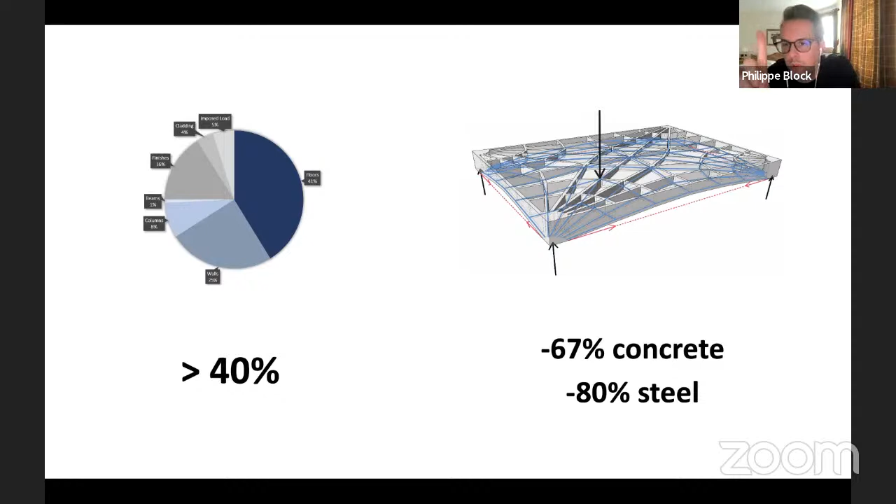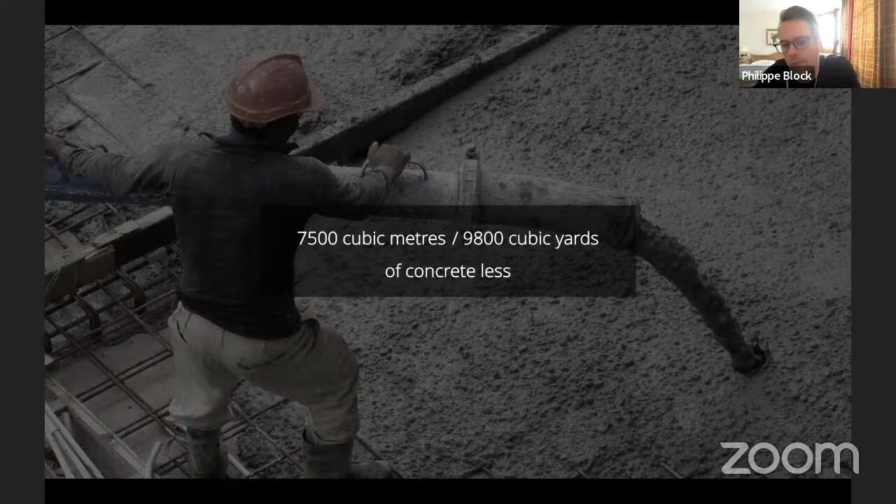But if you use these numbers for this one building of 25 stories, you would save more than 7,500 cubic meters or 9,800 cubic yards of concrete, which translates to 1,200 concrete trucks that would not have to go to this building site.

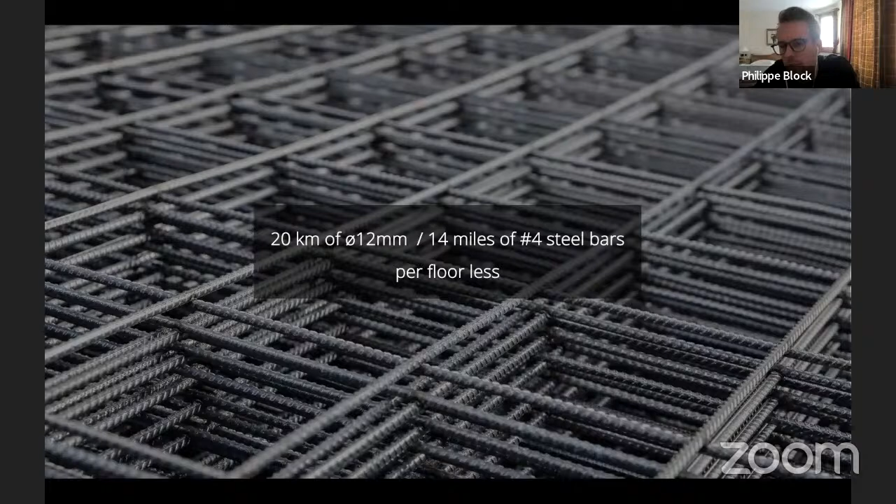Additionally, you would save more than 14 miles of number 4 reinforcement steel per floor. If you were to roll this out, it's like, and this is a nice coincidence, going from Zurich, where I live and work, to Brussels, where I'm from. Or equivalent to going from Miami to Orlando and back. That's how much reinforcement steel you would save for this one building.

But that's not the only thing that matters. Again, we should look at the real bottom line, which is the global warming potential. I wanted to break that down for you.

By activating strength through geometry, we get less volume - remember the armadillo vault - and lower stresses, which means lower emitting materials. That always goes together, so you get both effects already, giving you 3/4 of the reduction.

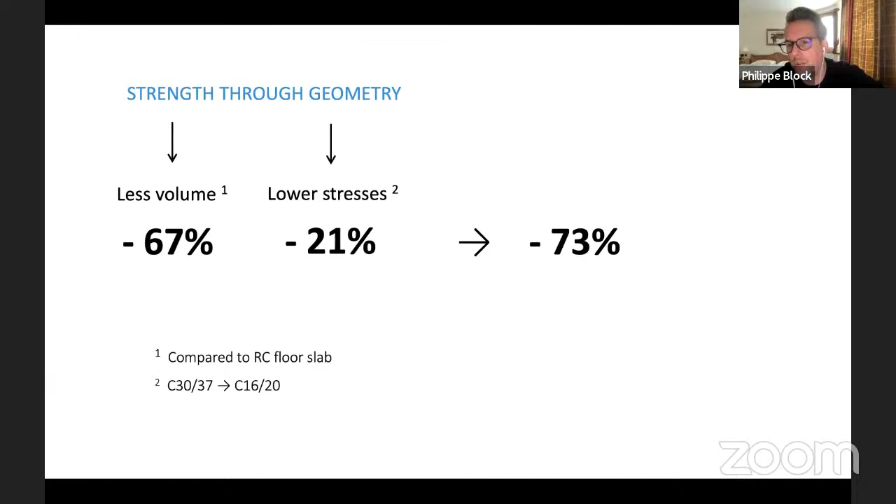But if you add a little material innovation - and this is no longer innovation, this is quite standard practice - these green concretes that use fly ash and other materials to reduce the problematic clinker ratio in your concrete, you can get to just a fraction of the contribution of concrete.

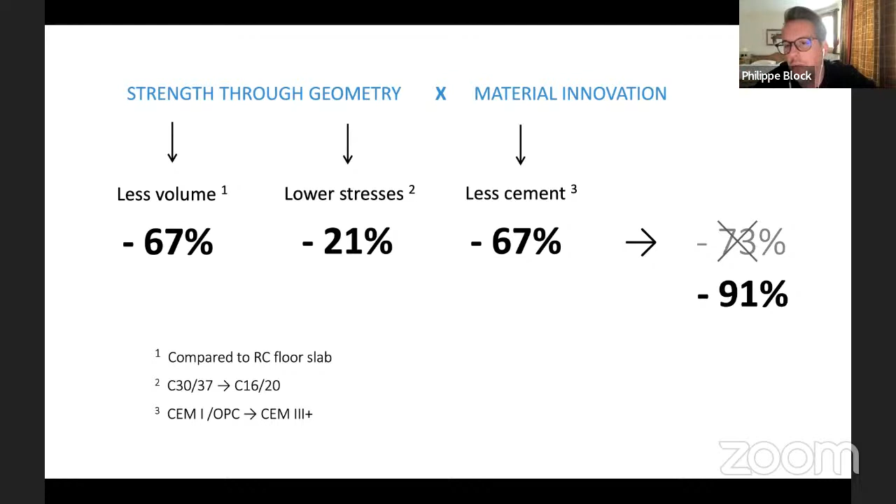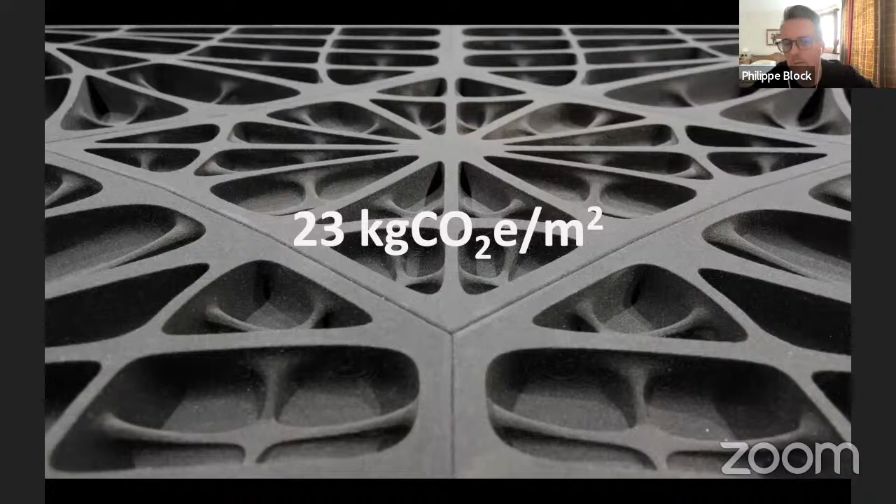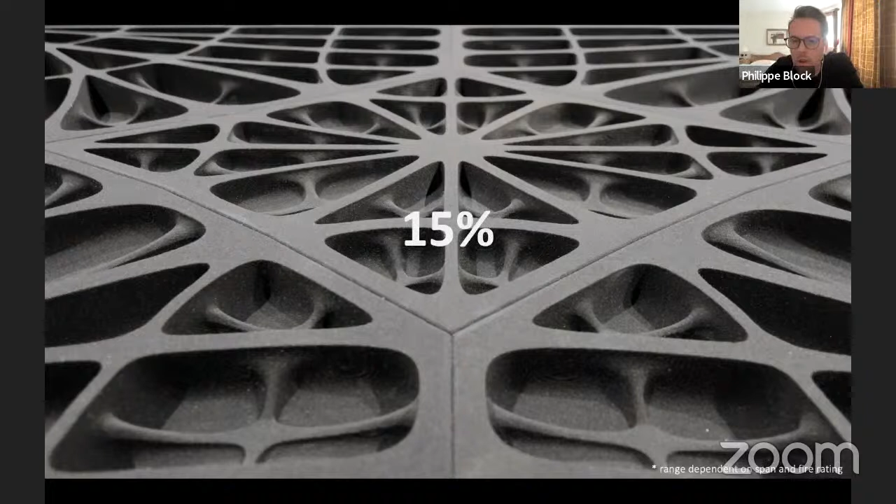If you then add the reinforcement steel, we can provide a floor with this number. If any of you are specialized in calculating these values, you'll see this is significantly lower than the state-of-the-art timber solutions out there. This results in less than 15% compared to a traditional reinforced concrete floor slab.

One thing I wanted to say is that we are now developing this system for the mass market. Holcim, our industry partner, has made a public statement that by 2023 this system will be ready for market for industrialized constructions. So every aspect needs to be checked, not just structural.

A key challenge in lightweight construction is acoustics. What's super exciting, and we've fully demonstrated this in HILO with professional acoustical measurements, is that rather than adding mass to deal with contact noises and low frequency transmission noises, we activate structural stiffness - something that, to our knowledge, has never really been used purposefully in the built environment.

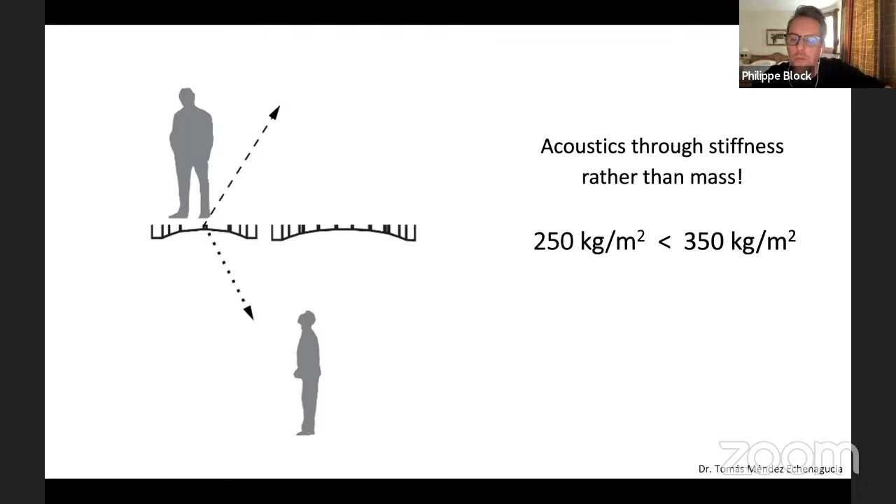That means in the worst case scenario, with the highest fire rating needed, we'd end up with less than 250 kilograms per square meter - we don't need to hit this minimal mass requirement, which comes from the Eurocode. So we will always be lighter than systems that don't activate structural stiffness.

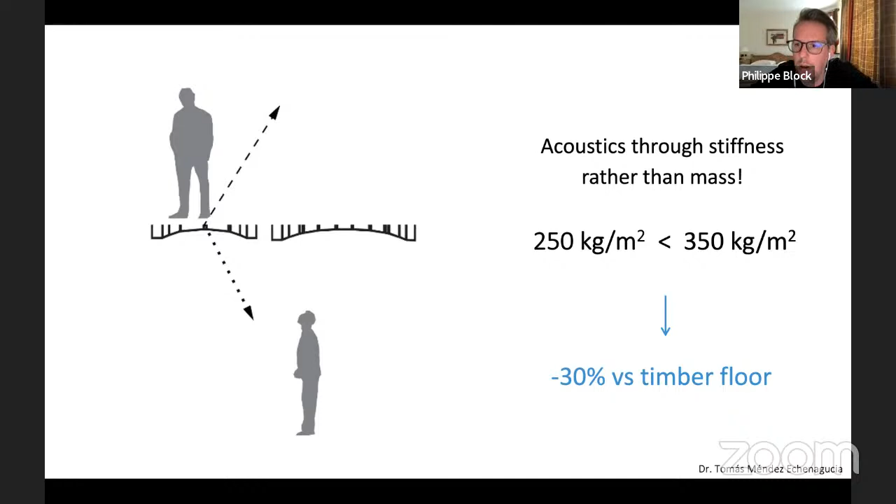I want to throw all of these criteria into the mix, because if we don't do that, we cannot have a nuanced, fair discourse about sustainability.

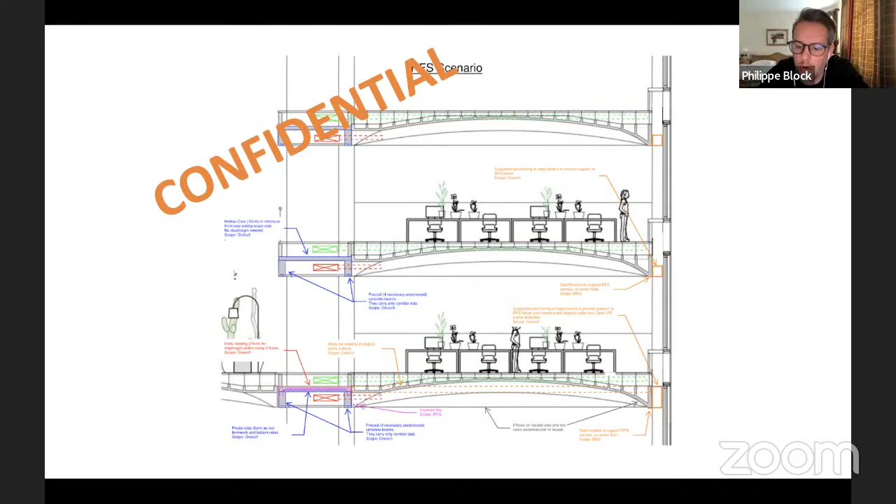It's exciting that we're working with many design teams in competitions and so on. The picture I'm showing here is a 130-meter tower in Brussels that was just submitted with the approval of the city architect, where the funicular floor was embraced from the beginning, and where novel building systems were introduced to reduce the total height of the building, offering more floors to the client.

A last thing I want to say is that, like in the Striatus bridge, we are developing this - sorry I can't show you, these are old images because there's IP involved - we're really hoping to bring this to market very soon, but the general concept is the same: fully reversible components using masonry logic, dry assembly, and all the advantages I highlighted in the Striatus bridge earlier. So it's a discretized system.

If any of you are excited to already start planning this in, we can deliver. It's also economically equivalent to what we have on the market. So get in touch with me - this is an exciting time to get involved and be first adopters indeed.

Again, looking at this image and realizing that more than 40% of the mass of all these buildings is in this super banal floor plate, introducing an idea like what I just presented could really get us a long way. I'll have to skip this, so apologies for that.

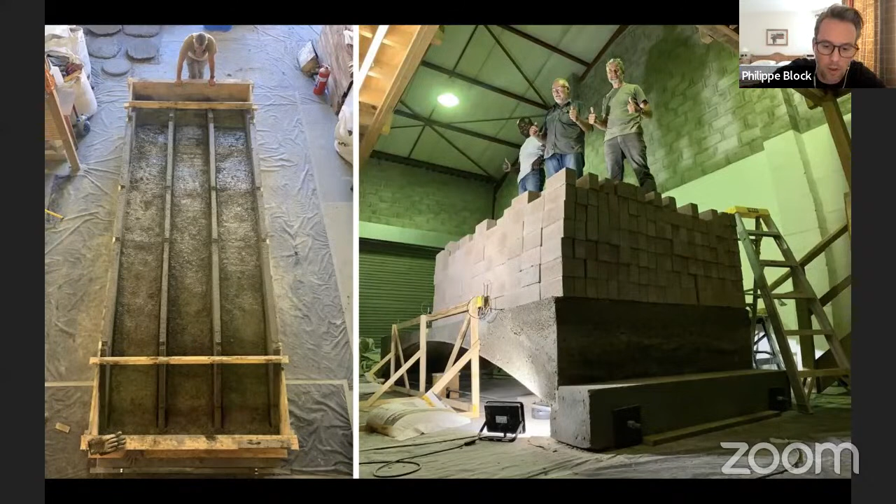I wanted to show what we're doing in South Africa. Similar kind of concepts. Maybe the key exciting thing is that we have a floor system with low strength material that uses shredded invasive plants as aggregate replacements. This is a final prototype before we built a demonstrator for the Department of Environmental Affairs in South Africa.

Sorry that I ran out of time for this, because I want to still conclude. I talked about structural geometry to reduce mass. I talked about funicular forms, so compression-only geometries that result in very low stresses, which means we can use very low carbon footprint materials.

That allows us to significantly reduce the embodied carbon coefficient of the materials used. We use digital fabrication to try to reintroduce structural geometry without the associated excessive waste. Think, for example, of what we do in Striatus, no molds, direct 3D printing. The concept of treating precast elements using discrete masonry logic gives you all these outlooks of circularity on many levels.

I didn't talk about this too much, but none of this would be possible, meaning economically feasible, if you don't rethink how everyone collaborates, and if we don't find efficient ways to connect the design team to everything that matters in fabrication on the construction site. So we need to integrate. We do this through computation, through COMPAS. We need to bring all of these different partners together.

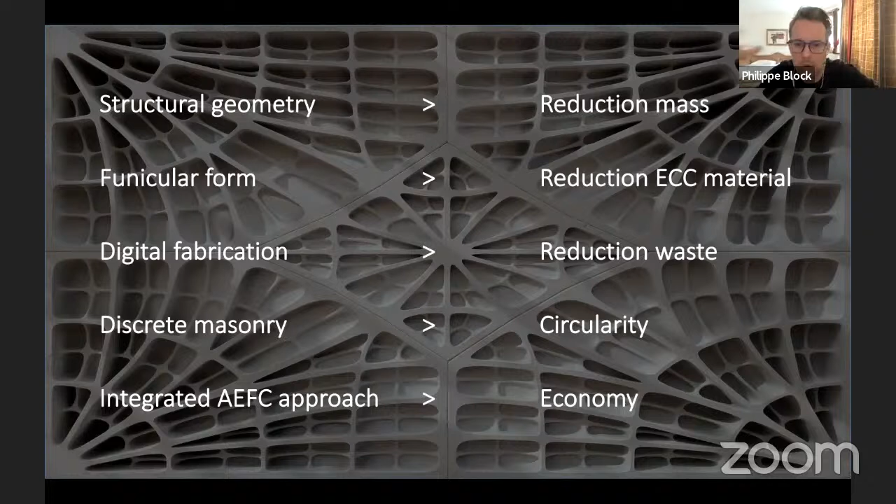So with that, I'm at the end. Sorry that I went 4 minutes over my allotted time, but I would be very happy to get your questions, your comments, your skeptical feedback. I love those because it allows me to sharpen our research and go further. Thanks again for the invitation.